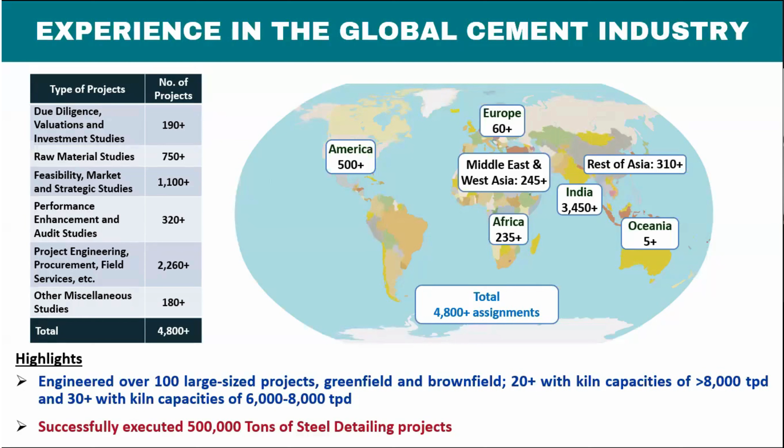We have done various kinds of studies like due diligences, raw material studies, feasibility, strategy studies, performance enhancement, and of course project engineering, procurement, field services, etc., basically for cement plants. We have engineered over 100 large size cement plants, both greenfield and brownfield. And steel detailing, on which today's webinar is going to happen - in that we have executed 500,000 tons of steel detailing projects. So this was a brief on Holtec.

Now I'll hand it over to Mr. Sunil Shah, who will take you forward from there. Thank you, Salini, for the brief introduction. Hello, everyone. I am Sunil Shah from Holtec, and I'll be your host for today's session.

Today, I'll walk you through the evolution of steel detailing workflows. Today's topic is value addition using integrated approach to steel detailing. We'll address the challenges of traditional methods and show how modern solutions like 3D modeling, CAD integration, and material management systems are transforming the industry. I'll also share practical insights on how we can leverage these tools to enhance collaboration, accuracy, and overall project outcomes. I'm looking forward to an engaging session with all of you, and I encourage you to ask questions at the end of the session.

So let's get started. Today's agenda points are: number one, typical flow of drawings and information. Second, challenges with old ways, that is working on 2D. Third, a better way this is solved. Fourth, integration with other trades with BIM. And we have 5 project examples which we will show you. Then fifth to ninth are the output files which come out from the Tekla 3D model, from where our fabrication process starts.

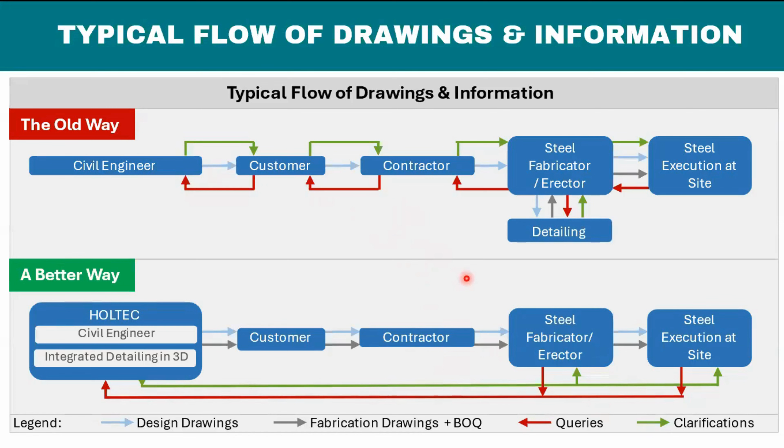So coming to the next, we have the challenges. What are the challenges we have in old ways using 2D CAD drawings?

The first challenge comes with inconsistent quality of execution. 2D drawings do not provide an effective way to visualize complex designs, leading to misunderstandings, misinterpretations, and inconsistent updates, resulting in errors and rework. They normally use normal detailing software, which does not guarantee consistent quality.

Second challenge, which really affects the customer, is poor control of steel quantities. They prepare a quantity sheet without real time tracking, with manual data entry in the BOMs. Material may be ordered in excess or insufficient quantities, leading to cost overrun and delays.

Problem with material consistency is a real problem nowadays, which also causes higher wastage. Wastage is a main criteria, and reconciliation and a lot of other problems are involved here.

The third challenge comes with extra time and effort taken in coordination. Changes and revisions also happen during the engineering process where detailing and engineering are involved, and it takes a long time for the outside detailer to communicate, which leads to project delays.

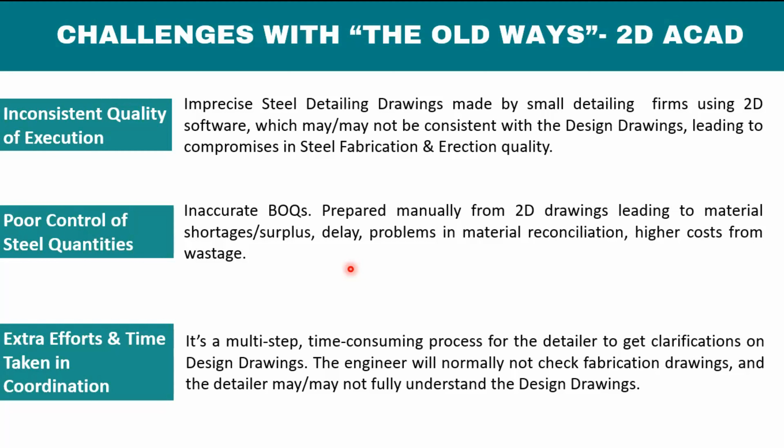Now I'm showing you the better ways while using 3D modeling software. The first thing is that you get highly improved quality of execution. Due to 3D modeling, high quality fabrication and erection drawings integrated with civil engineering processes are produced.

3D rendering gives stakeholders a real view of the project. We have also worked for many customers in the US and other advanced countries, and we specialize in using specialized software, which is an advantage in providing highly improved quality drawings.

Second benefit you have is precise control of steel quantities. Accurate BOM along with drawings and an accurate advanced bill of material is a real challenge. From 3D, since you are connecting all the members, keeping in mind all the dimensions as per the input drawings, it normally creates a very accurate ABM.

Material ordering happens at the right time, which leads to significantly reduced wastage and cost. This is a very important thing — 3D modeling guarantees precise control of steel quantities.

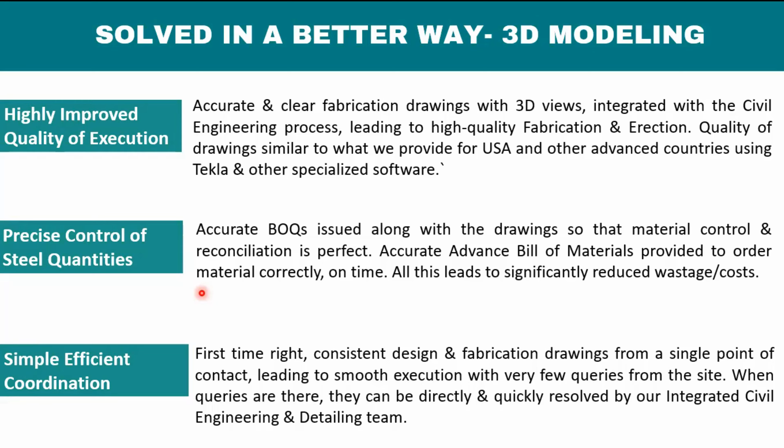Now our main topic is integration with other trades and BIM. We'll be sharing five examples of using 2D drawings in our 3D modeling system. We will show you how 2D civil drawing is utilized, how 2D mechanical drawing is utilized, and the third example is integration with an RCC 3D model.

This model normally comes from other parties, where the main structure is made up of RCC and steel. Then you have to coordinate a lot of steel members with RCC — insert plates and anchor bolts are involved. Coordination of these with the 3D RCC model from the outside party really helps, and the final drawings give a real advantage with smooth flow of work and construction.

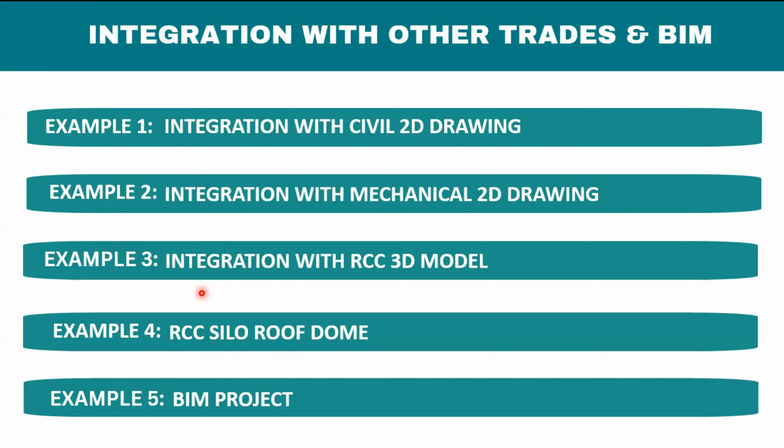So I'll be sharing all five examples with you. Let us start with the first example: integration with civil 2D drawings.

I'll explain to you — this is a 3D view of a model taken from the Tekla software. Here, different colors show different kinds of structures. Where I am running the pointer, these are the columns in yellow and gray colors, and the green ones are RCC slabs, and you can easily identify the steel structure here.

There are three sets over here. Two are on this side resting on an RCC building. You have a couple of two stairwells running here, and a giant steel structure on the other side. Here is another cable gallery inserting inside the RCC building, and you can also see a couple of platforms inside the RCC building. So you can understand from this 3D view itself how much coordination is really required here.

You have to take care of all the dimensions.

You have to take care of all the information provided in civil drawings. Our main task here is to see how accurately we can utilize these 2D drawings, because when working in only a 2D environment, these things are not possible.

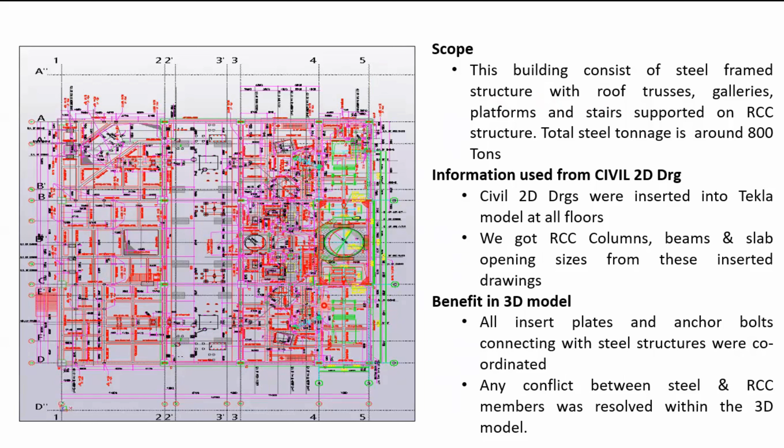So likewise, you have proper coordination from the very beginning of the project, and it really reduces a lot of back and forth with the parties, since coordination is done within the Holtec team. In this project, the tonnage involved was around 800 tons, and currently the progress is going on smoothly.

All the projects we are showing you here are current projects, or some may have been completed with erection done. There are no issues coming in terms of conflict with insert plates, anchor bolts, or any conflict with RCC members, because everything is being taken care of inside the model before the problem reaches site. So you saw the advantage of 2D civil drawings being used in 3D Tekla while doing steel modeling.

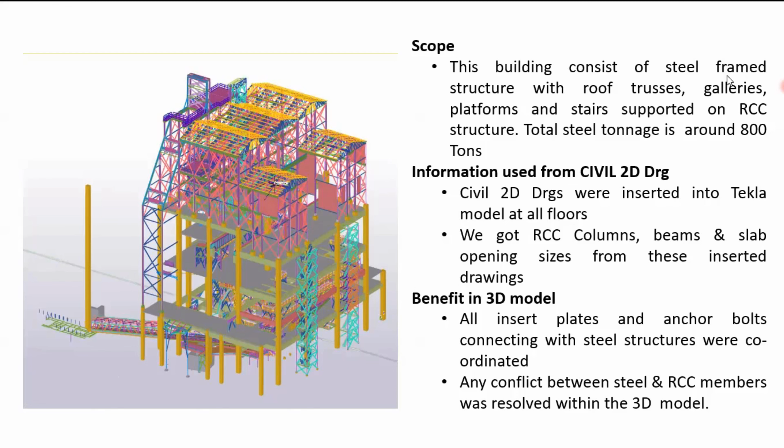Similarly, for other trades, we want to show you mechanical 2D drawings. How mechanical 2D drawings, where you have equipment, ducts, and everything, can be utilized, and we are using it.

What I want to show you here is that we can even utilize these equipment mechanical drawings, where insert plate location and support location at the exact elevation can be done so easily. Roughly, tonnage-wise, this project was around 200 tons, and it was done very quickly.

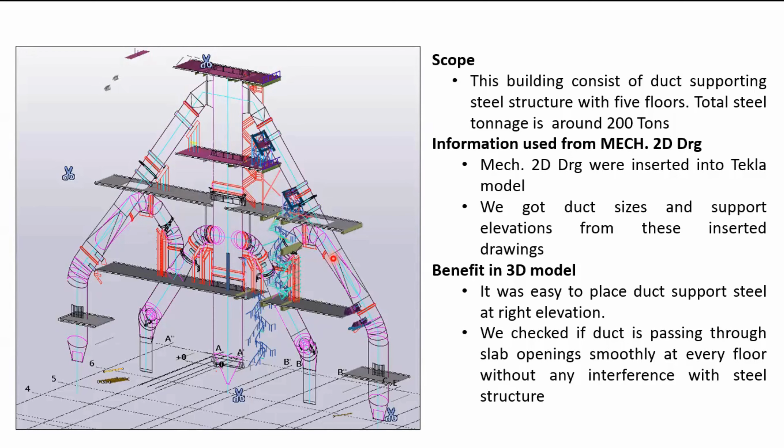So what we did here, we checked if the duct is passing through the slab opening smoothly at every floor without any interference with the steel structure, and it was easy to place duct supports at the right elevation, which you can clearly see from the zoom view of the same structure.

And this gave us an advantage without any fear in the mind that there may be a conflict at site. So you can understand the real advantage we are getting in inserting these. This is not really possible while we are doing it in 2D drawing.

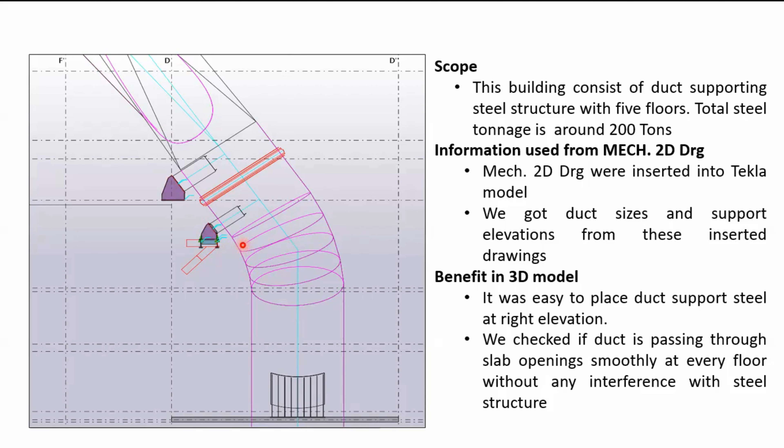So another great example we have is integration with RCC 3D model. Whatever we discussed so far was integration of 2D civil drawings. Then we discussed integration of 2D mechanical drawings. Now here is an integration with RCC 3D model.

The great thing that happened here is that this RCC model was shared with us. In earlier ones, it was 2D drawings. Here, the RCC 3D model was shared with us, which was a great advantage for us. And floor-wise insertion of AutoCAD was not necessary.

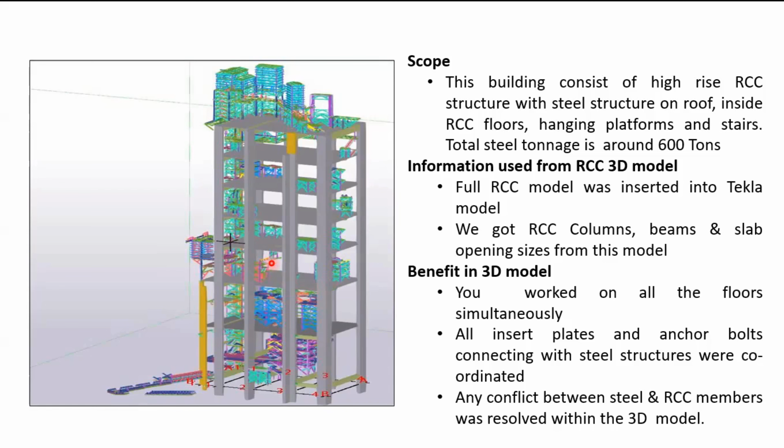So I'll be sharing some zoomed detail, part-wise, of this whole structure. This is showing a full-fledged building in a larger view. So in the second one, we are trying to show you the top portion of this RCC building. You can see circular openings in the slab, which were already there in the model. So keeping everything in mind, coordination was done.

This steel structure was created right from here. You can see staircase, cladding, then roof trusses. And in skew pattern, you can see this gallery material passing through here with a platform. So many activities happening, and doing it in Tekla with ease is a real advantage.

You can understand how risky doing detailing in 2D for such kind of structure is. There may be a lot of material wastage, there may be a lot of delays, because coordination in 2D is not happening the way we are doing it in the 3D model.

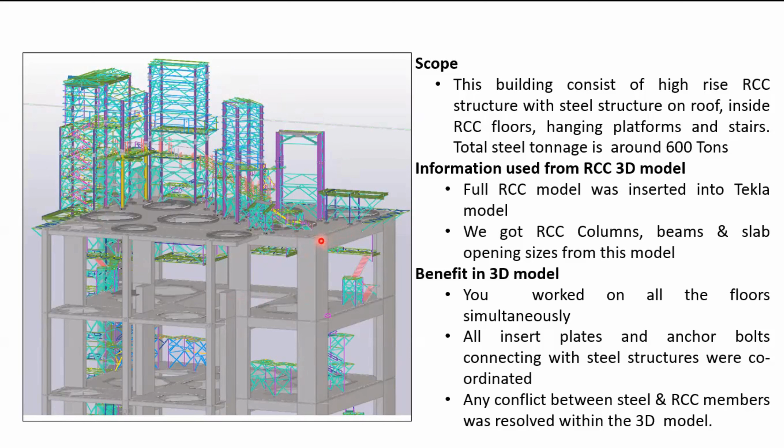So similarly, the same structure at middle height, you can clearly see a staircase passing through inside. Some RCC columns are terminating here, and one small platform with some structure attaching to the giant RCC column. So you can clearly see the insert plate location.

It was easily coordinated, and the RCC modeler was informed where he has to place the insert plates, and here where he has to place the anchor bolts. So coordination became very easy. Any conflict arising at site is being resolved within the model here itself, within the Holtec office. You can understand the kind of problems we normally face during construction, but here everything is running very smoothly.

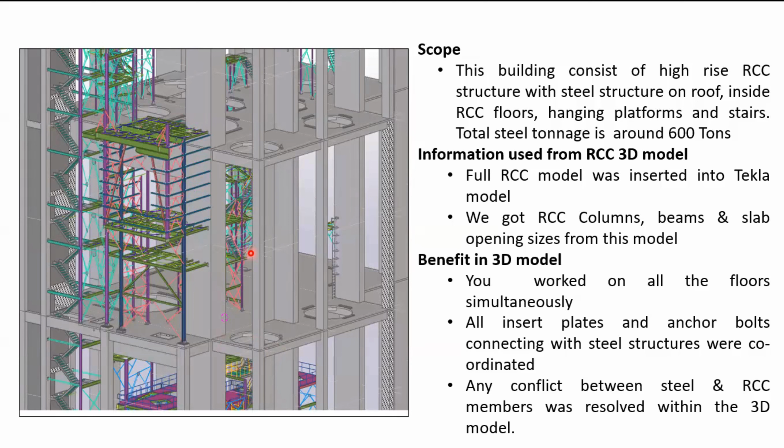So another zoomed area of the same structure I am trying to show you here. Between two RCC floors, you have a hanging structure. Imagining this in 2D becomes very problematic. You have to cut sections in 2D in all directions. But I can visualize the whole structure between two RCC floors, how it has to be erected, where I have to place the insert plates.

So immediately, when we model this structure using supplier drawings or AutoCAD drawings, we are easily able to visualize in 3D how this hangs, at what location this steel column is starting on the RCC, where they need to place the insert plate, whether there is an insert plate at this location or not in RCC. That way also, the integration between the civil and steel detailing teams is taken care of.

So you are seeing how smoothly work can be done, and all insert plates, connections, everything is being taken care of. Any conflict between steel and RCC members will be resolved within the 3D model.

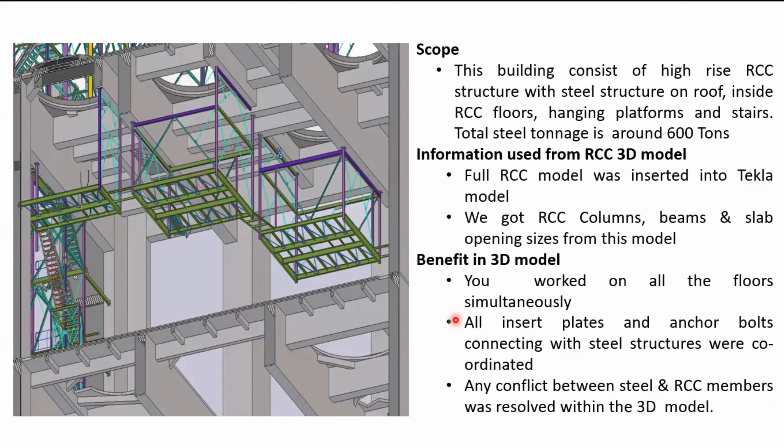Another view here, what I want to explain to you: the floor to floor height is very huge, where some equipment processing is going on. You have circular openings here, a lot of things happening here. One is a platform here with handrails and supports. Then you have a number of bracings. Here are handrails. One thing I want to highlight in this picture is that you have a deep RCC beam just above this platform.

So it was very easy for us to find out the headroom here, whether it will be a problem after erection or not. So this way you can see how easily we could visualize and find and tell the engineering team that this RCC beam may create a headroom problem here. So you saw the conflict between this RCC and steel beam was resolved within the 3D model.

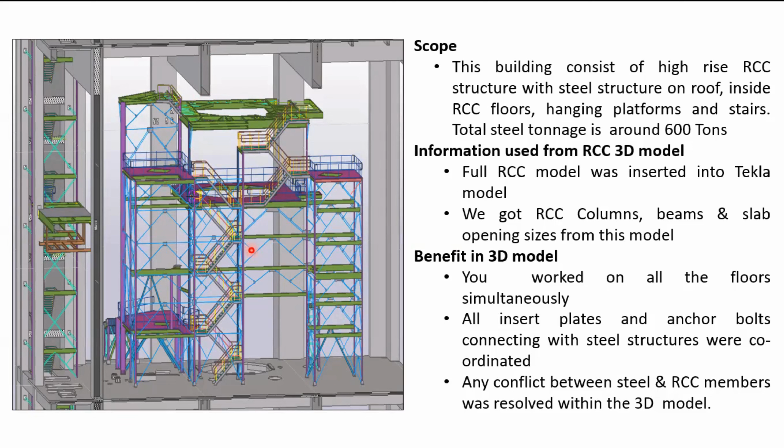So this is the real advantage of inserting an RCC 3D model, and complex structures like this one can be executed very smoothly. Not much queries from site. If any query comes, we share these snapshots with the customer, so that they can better visualize it and take the action if necessary at site.

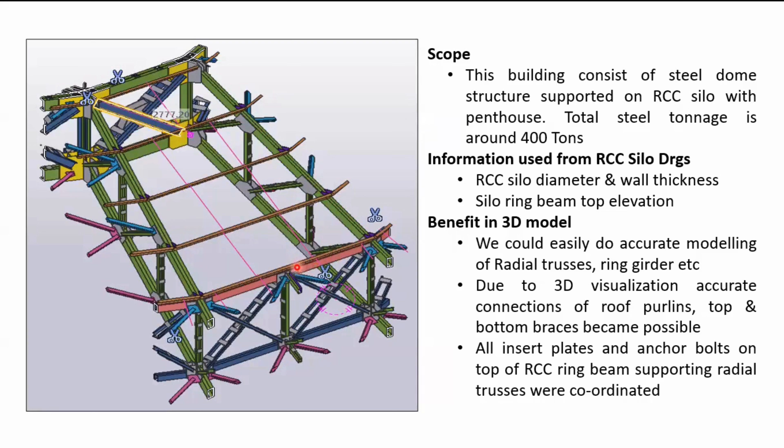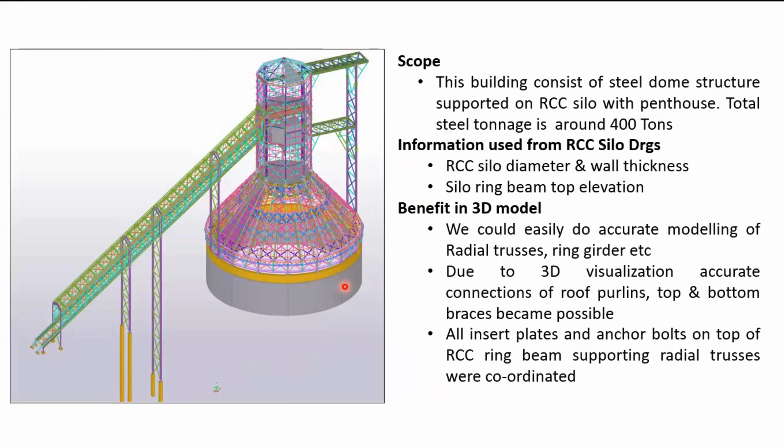So this is like a 400-ton project. Only this part was there, and we generated the fabrication drawings very smoothly. I'll show you in the next picture. This is a radial truss. We have hidden a lot of purlins for clarity. This is a ring beam where the truss is connecting. Again, purlins are resting here. Then we have an embed connection and anchor bolt right here on an RCC ring beam.

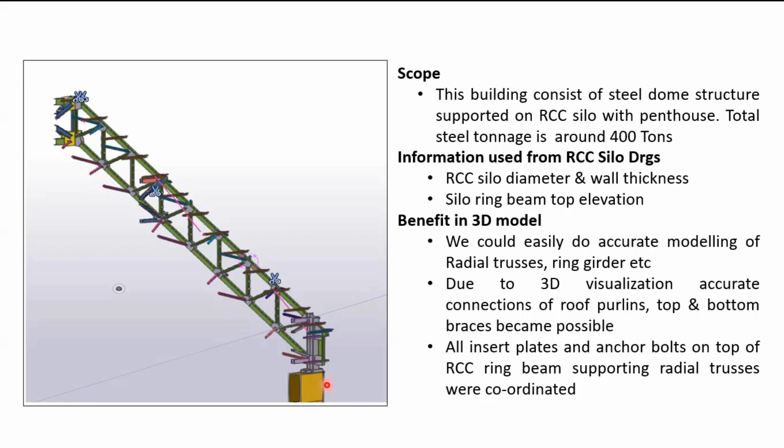So you can clearly visualize how 3D modeling is benefiting everyone. You have saving in material, you have saving in time, you have less people involved here. So likewise, there are so many advantages which we want to highlight. And we are currently doing it successfully, and we will keep on doing it, and we will utilize these advanced tools in future also.

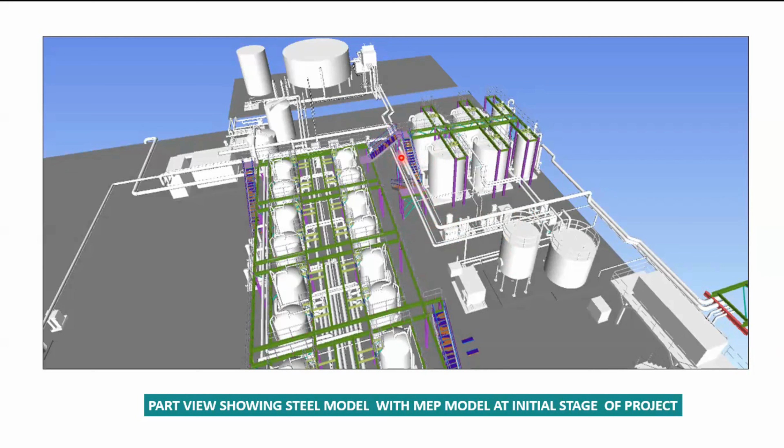So these are the real advantages in BIM. And in the next picture, I'll show you, this is the pipe which is hitting the stair in the beginning of the project. So what we normally do, we share our Tekla model in the form of IFC. The customer shares sometimes IFC, sometimes they directly send the Revit model. They also send us the Navisworks model, which we convert to IFC, then we insert it.

So normally we insert IFC files inside the model for the BIM, and all coordination is taken care of by the customer, by the BIM manager at site. So this is the normal way of working with US customers nowadays, and it is a normal practice.

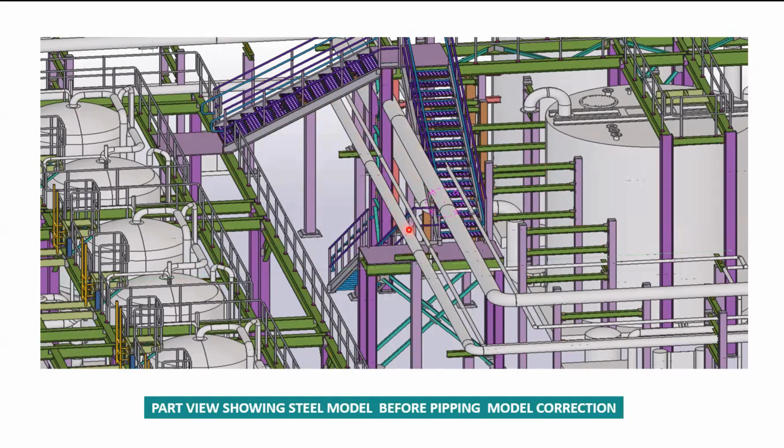So here you can see, from earlier pictures, the model has grown so much, where we have started showing ladders, handrails, all equipment pipes, everything well in place, with handrail here, stairs passing, except these pipes, which were supposed to rest on these Tekla structure supports. So these pipes had to be shifted here, which we will show you in the next picture.

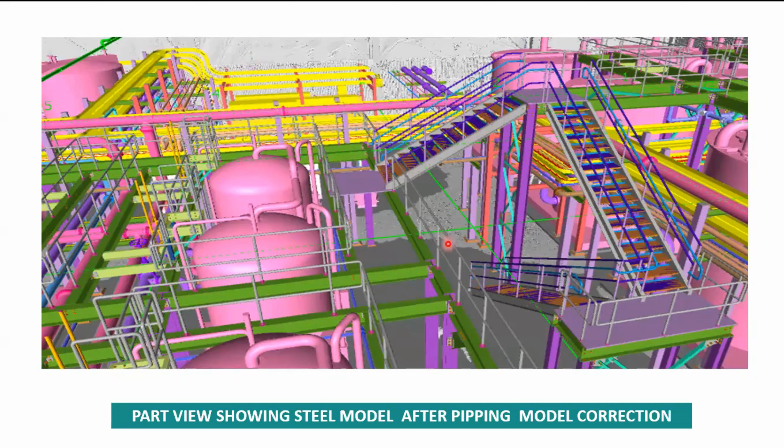Then you have a cable tray in yellow color, exact location. Then you have control panels here. Then the pipe is passing through the existing structure. So you can see how smoothly things are growing. The model is growing, and we are coordinating it.

In the next picture, what I am trying to show you is that I have hidden other parties' models. I want to show you how much this model has grown now. All pipe structures, all platforms, handrails, these are our part of scope. And we can clearly see after checking conflicts with other vendors like MEP modelers and piping modelers. When there is no issue, we start creating drawings from this model, and we start releasing sequence-wise to our customer.

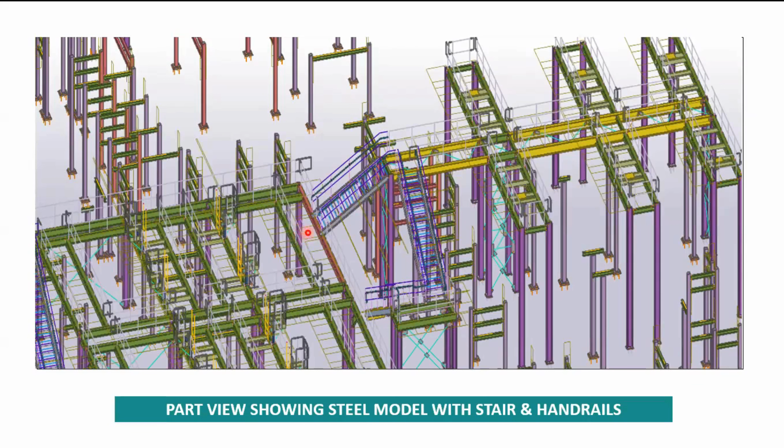So our fabricator simply gave us three models: one Revit model showing these pipes, then cable tray within the Revit model. Then they shared with us the piping model. This was shared in Navisworks. Then they again shared a point cloud model, which we inserted, and we found that all existing floors and walls can be seen clearly here.

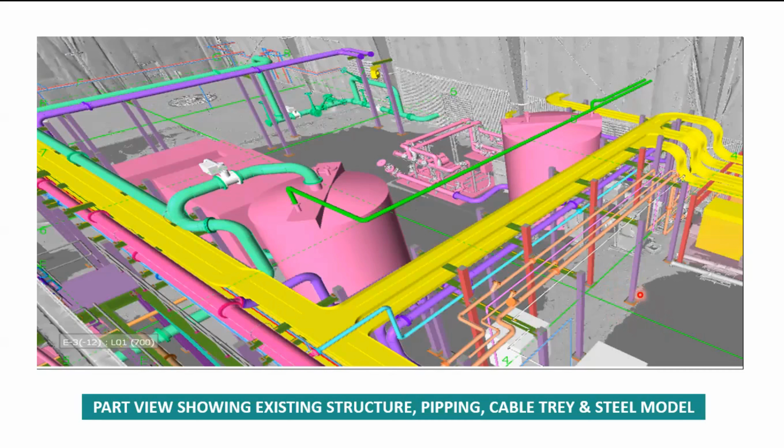So what we did, we coordinated our column base plates with the site model, and you can imagine, it is being taken care of right within the model. So any site issue is being resolved within the model. So that way, you can understand how advanced detailing has gone, with everything being done virtually within the model and being solved, so that in the later stage the project does not overrun the cost, and at the same time, costs are not affected for the other agencies.

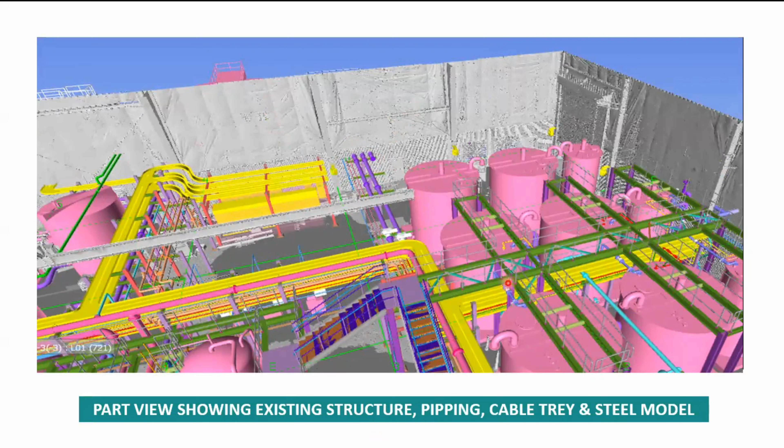Here is another model I am trying to show. This is a picture taken from maybe a drone camera in that same model. This is a monorail, where we can clearly coordinate that there is sufficient height between the cable tray and monorail. And again, a similar cable tray passing through. And these pipes passing through and going to the other side of the building. So finally, we were able to coordinate everything with all the stakeholders, and our Tekla steel structure was right in place and well coordinated.

And these are the small brackets which we had to rest on the existing structure. So you can clearly visualize how smoothly things are going here, and all the stakeholders, all the team members are taking advantage of it.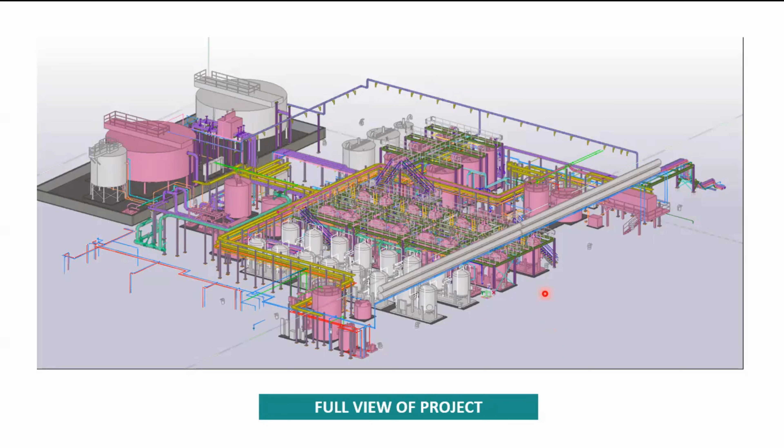So this is a normal practice there in US, and we are trying to bring this here in India in most of our projects, and we are trying to convince our customers, though there may be some difficulties in the initial stage, but this is what is going to happen in future. And you can understand from here, we are almost future ready. In fact, we are ready.

So far we talked about the modeling and integration of 2D drawings, then BIM models. Now here I'll show you what are the outputs which come out from the 3D model. So this is the first, material list. We call it an advanced material list. It comes in the form of an Excel sheet, or it directly comes from Tekla without any title. A foreign client wants it directly, but for our customers, we have this advanced bill of material in Excel form.

So here you can see the advantage: when your main steel structure is in place, we immediately generate this advanced bill of material and share it with the customer so that they can book the material well in advance with the mill. In US, prices of material keep on changing. So at the very beginning when the project starts, the main target of the fabricator is to book the material at the earliest stage so that they can freeze the price and pick the material.

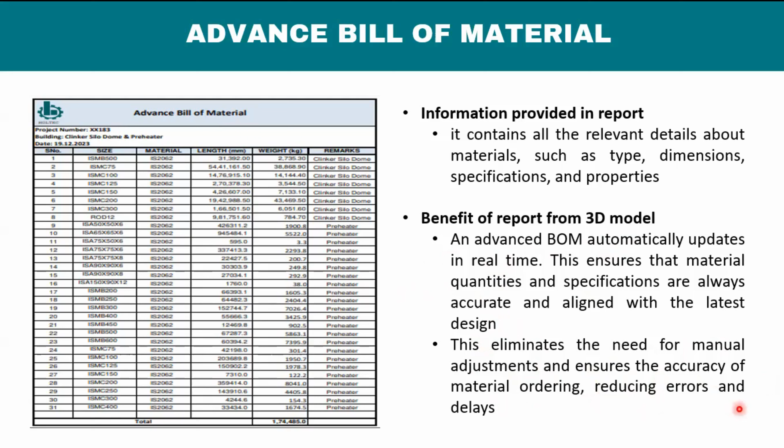Now you can ask, if some changes are happening, what will happen? Normally, if any changes take place, this advanced bill of material automatically updates, and we share the same with the customer and indicate where the changes are. So this way they have the real advantage, there is no manual adjustment, and we ensure accuracy of material ordering, reducing errors and delays. So there is a clear advantage here.

And the next output which comes from the 3D model is a fabrication drawing. Though it is not very clear, I'll explain to you. This is a drawing of a sway frame showing the elevation and top view. Then you have small part details. Then you have sections. Here is a summary of the main material, which is directly linked to our advanced bill of material. You have a bill of material here with the total tonnage.

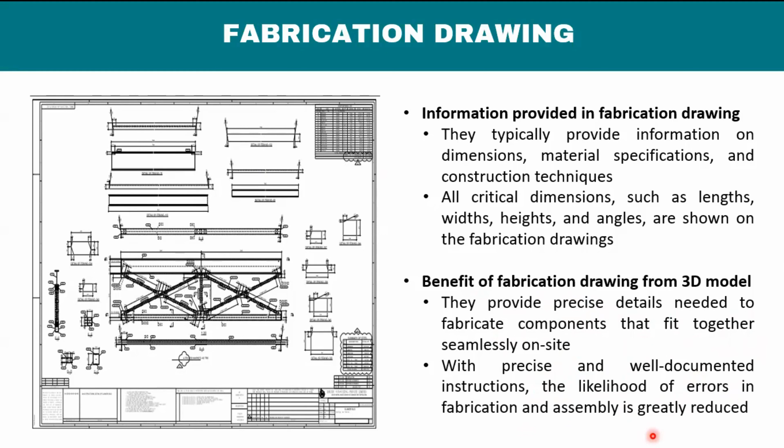So the benefit here is that when drawings are extracted from the Tekla model, they provide precise details needed to fabricate components that fit together seamlessly on site. With precise and well documented instructions, the likelihood of errors in fabrication and assembly is greatly reduced. So you can understand: 3D model, then output advanced bill of material, and then fabrication drawings.

This is another fabrication drawing view. You can see this is a radial truss which we discussed in our earlier complex 3D model. These are the zoom views, everything shown clearly here, total bill of material. So you can see the benefit: accurate dimensions, material sizes, and the drawing automatically reflects the changes made in the model. That is the main advantage. You don't have to look into old drawings to see where the changes are, whereas we get it done automatically within the model.

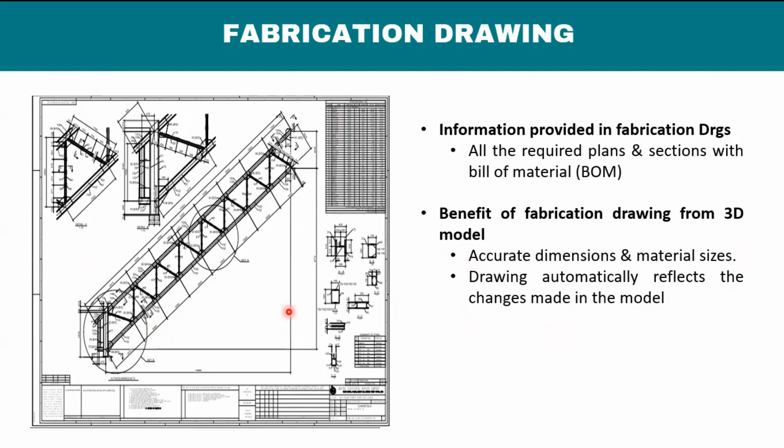Similarly here, this is a typical erection plan of the same complex dome structure which I shared with you. Here, this is a top chord plan. This is a bottom chord plan. Then again, sway truss section. Then you have radial beam typical sections. Then you have a number of joints where these have to be field welded.

So the advantage you can see: it shows how structural elements should be placed, assembled, and connected on site. For those who are not familiar with erection drawings, that's why I want to show it here. Now, the benefit of erection drawings from the 3D model is that all assembly marks shown in erection drawings are linked with the model and fabrication drawing.

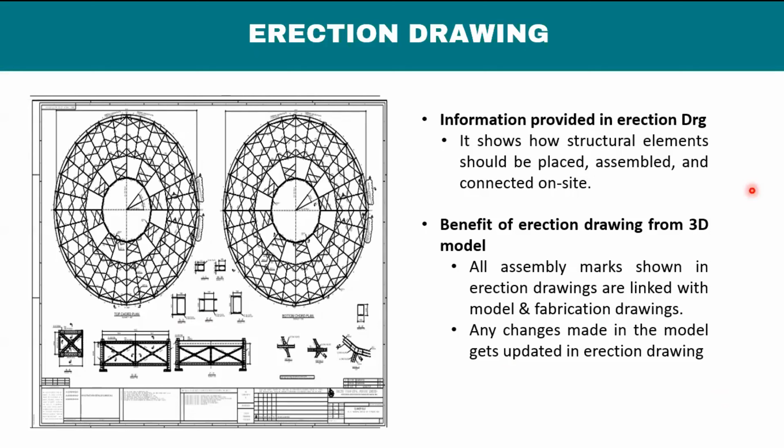It means if I am making any change in the model, my advanced bill of material will get updated, my fabrication drawings and small parts, and even erection drawings get updated. So any changes made in the model get updated in erection drawings as well. These are the advantages I want to highlight here, which are real advantages. And this is the erection drawing which is normally used by the erector at site.

Then we have a consolidated quantity sheet. You can see here that some of our customers want all the quantity sheets showing the bill of material in Excel form. So we have a standard consolidated quantity sheet. The real benefit is that it contains the material quantity of the whole project required against each fabrication drawing.

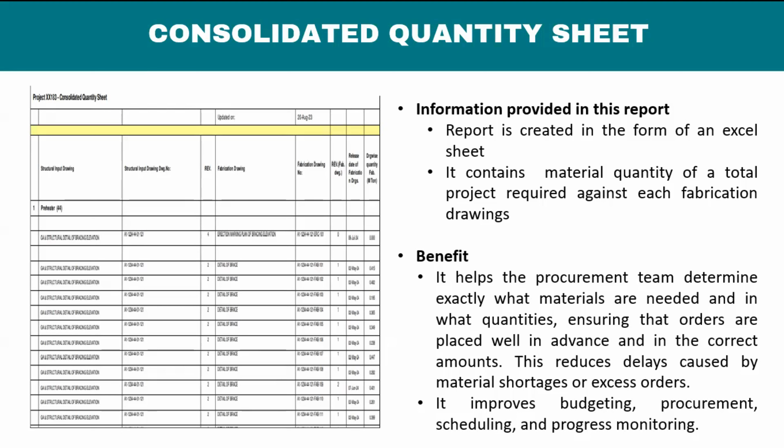So it helps the procurement team determine exactly what materials are needed with what quantities, ensuring that the orders are placed well in advance. So whenever we are uploading the drawings to the customer, along with that we also share this quantity sheet, which is assembly drawing wise with quantities, and this can be easily tracked.

Another output file is a CNC file. This is partly being used in India, but in the US, when your drawings get approved and are ready for fabrication, our US customers ask for these files. These files can be fed into their CNC machine directly, and whatever is shown in the Tekla model and approved drawings, they start the fabrication process.

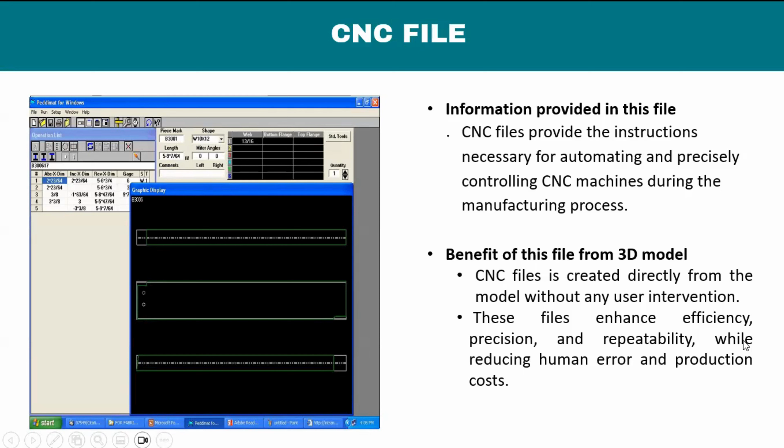So CNC files normally provide the instructions necessary for automating and precisely controlling CNC machines during the manufacturing process. And the benefit is this is created directly from the model without any user intervention. So these files enhance efficiency, precision, and repeatability while reducing human error in production.

Another such file is a DXF file, which is normally used for plate fabrication. Again, in India it is partially used, but overseas, including the US and Canada, it is widely used, and this is a normal output file generated from 3D software like Tekla and others.

For those who do not know much about DXF files, I want to explain. A DXF file contains the geometrical shapes and elements that make up the drawing, such as lines, polylines, circles, arcs, and splines. DXF files are commonly used in CNC machines, laser cutting, and plasma cutting. The benefits here are that DXF files, like other reports, are created directly from the model without any user intervention, and they can be easily recreated if changes are made in the model.

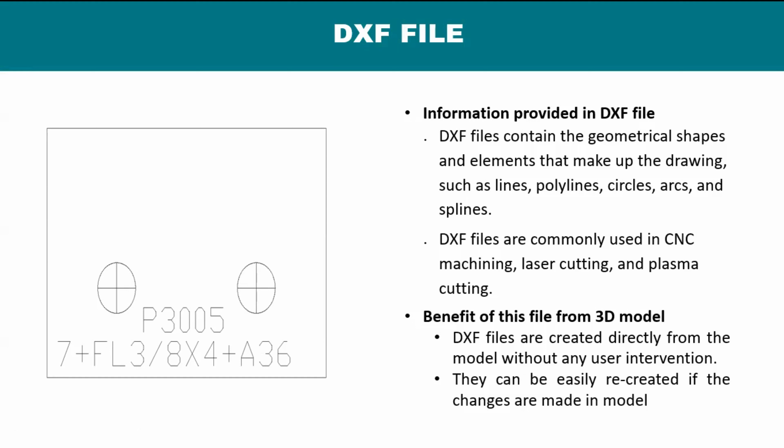So you can see here the whole chain, right from the anchor advanced bill of material till the CNC file. Everything is well connected within the model. So there is no user intervention, and everything is getting coordinated automatically.

Another requirement for our customers is a bolt list, which is again created directly from the software. A bolt list typically contains essential data about each bolt, which is crucial for construction, fabrication, and assembly processes. The benefit of generating the bolt list from the 3D model is that the data is accurate and directly linked to the design.

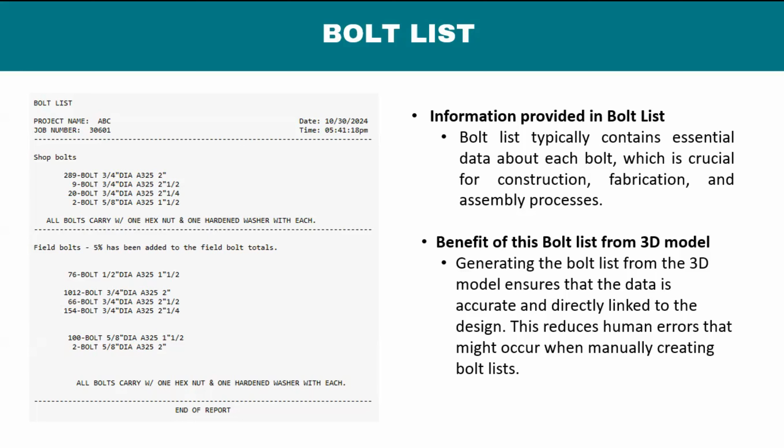So this reduces human errors that might occur when manually counting bolts. It looks very simple here, but counting bolts manually is a very big task. You have to involve a separate person for this. So if this is taken directly from the model, it is a real advantage, and the accuracy is there.

Similarly, these material management reports are additional reports which some of our US customers utilize, but it is my duty to show you these reports. If required, we can also provide these. These come directly from the software. Number one is the MIS list. The MIS list improves procurement and inventory management.

Then you have another list, the PowerFab report. It streamlines steel fabrication and quality control. Then you have the EJE report, which provides real-time tracking and facilitates engineering job execution. So these are the outputs which I have shared with you, and you can see a real advantage there.

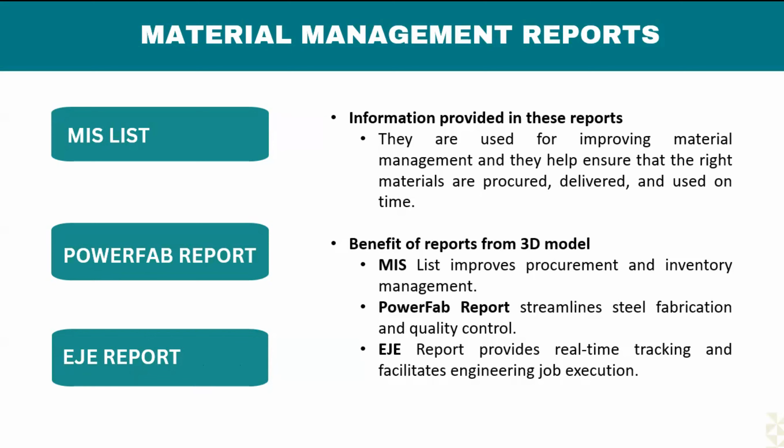So I would like to summarize this. Today we covered the evolution of the traditional flow of drawings and information, and how new tools like 3D modeling, BIM, and advanced material management can help streamline your process, improve project efficiency, and reduce errors. We also looked at real-world examples of how these technologies can be applied in your projects.